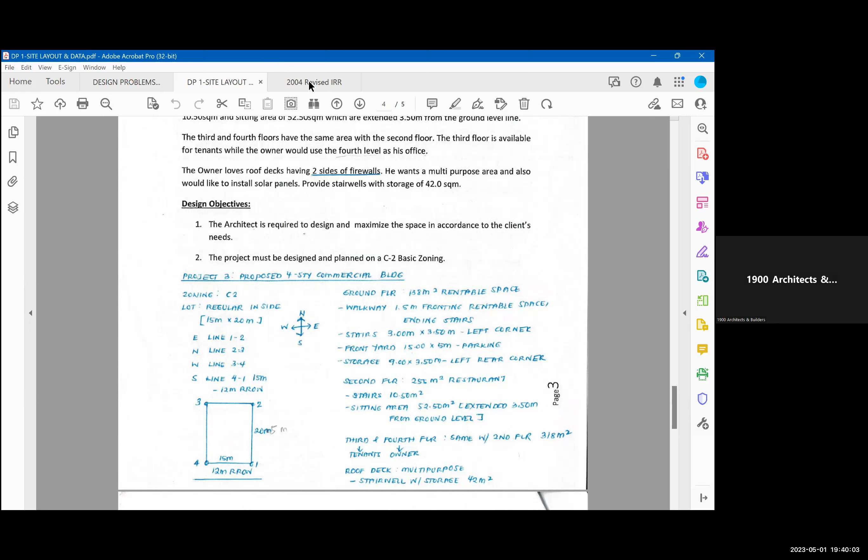So ang question ay ano daw yung ceiling height ng owner's office if using artificial ventilation. So, paano natin makukuha? Alamin natin kung anong floor yung owner's office. Ang owner's office ay nasa 4th level, sorry, as his office. So, ang nakasulat dito sa Rule 8 or Rule 7, yung succeeding floors daw ay not less than 2.1. So, the answer is 2.1, letter C. Okay? So, minimum ceiling height.

Okay, so number 5, based on the given data of the project, how much is the percentage of site occupancy? So, like ni-mention ko kanina, ano ba ang formula ng PSO? PSO is AMBF over TLA. Meron na tayong AMBF, nakuha na natin yan kanina sa number 1. And then, ang TLA naman is given sa project. So, AMBF, 202.5 divided by the TLA, 307.5. Ang lalabas niya ay 65.85%, which is letter A.

Okay. Pero may question ako. What if ang tanong dito sa number 5 is based on the book, based on Rule 8, how much is the percentage of site occupancy? Kasi, di ba, pag nag-base tayo dito, may given na siyang percentage. Right? So, hanapin nga natin ulit. Compare ko lang yung page ko. So, table 8.1.

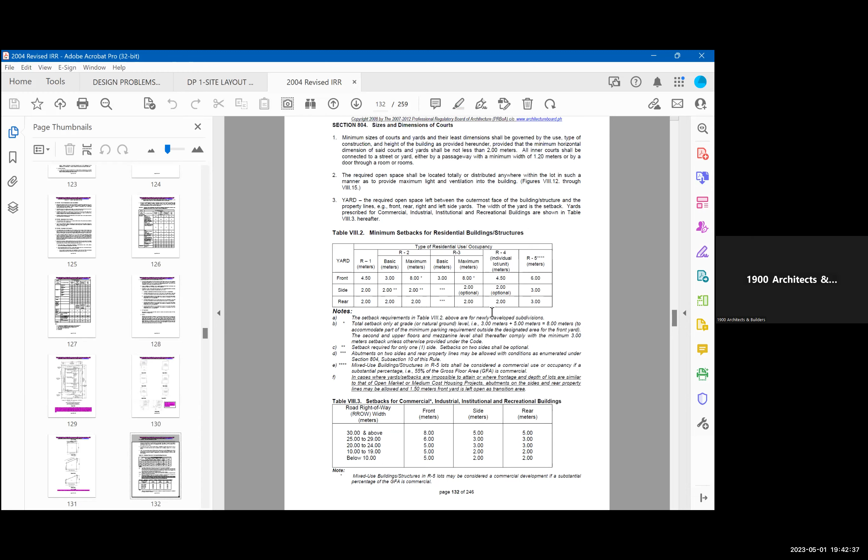Okay. So, if the question is not based on the problem, if the question is based on Rule 8, what is the PSO? Magre-refer tayo sa book. Minsan may ganun ding question, based on Rule 7 or Rule 8, tapos minsan naman based on the problem. Kasi pag based on the problem, makukuha natin yung exact percentage. But based on the book, may sadyang required percentage siya. So, commercial 2 yun, di ba? So commercial 2, yung PSO is either 75% without firewall, then 85% with firewall.

So, be conscious din sa mga ganun tanong. Maraming questions na sasabihin naman niya kung saan ka magre-refer. Lalo na pag sasabihin niyang based on Rule 7 or Rule 8, wag nating pababayaang hindi natin masagot ng tama kasi nandito na, nasa Rule 7 and Rule 8 na yung sagot. Okay?

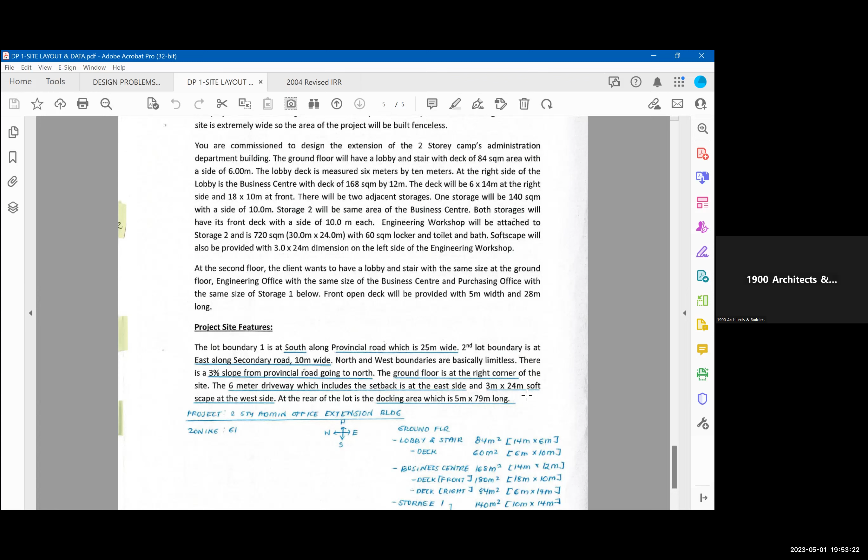The ground floor is at the right corner of the site. The 6-meter driveway, which includes the setback, is at the east side, and 3 meters by 24 meters softscape at the west side. At the rear of the lot is docking area, which is 5 by 79 meter long. So yon, ang dami ng data, ang dami na.

Sige, eto. So the first thing we need to do, isa-isahin na natin. Huwag muna tayo medyo mabigla sa mga paano natin i-layout to. So just write down yung mga important things: the project title, the zoning, and then yung data ng every floor, every area per floor na sinabi niya. So based dito sa problem, kumbaga yung location per area ay detailed.

So let's try to do the floor layout. So wait lang, share ko muna sa inyo. Okay, unahin muna natin, iba sinulat na natin isa-isa kung paano niya yung per area. So unahin natin, where do we start? Kung saan sinabi, saan ba unang sinabi ng problem, hindi ata mag-share.

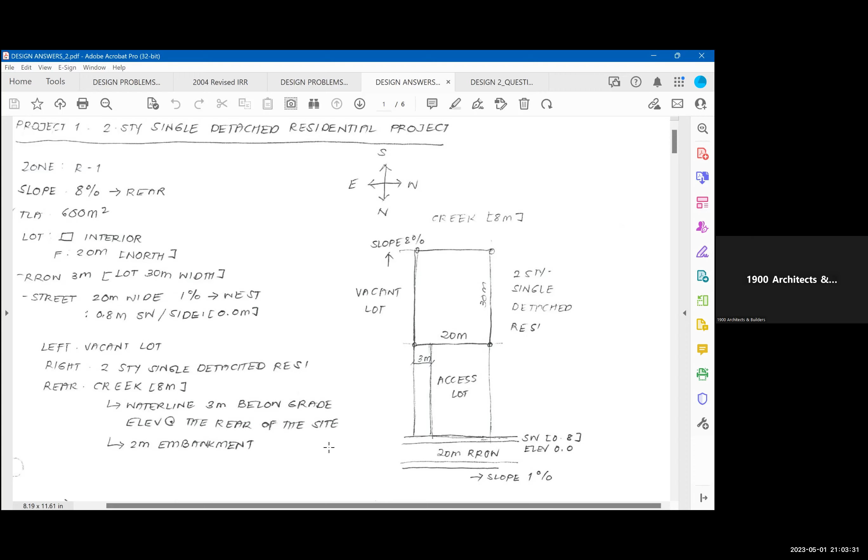Okay? So yun yung mga information. Sinulat natin yan. Importante na sulat nyo din. Okay. So hopefully nakuha nyo to, na-plot nyo ng tama. So let's go to project 2 naman.

Okay. This is project number 2. A proposed garment and undergarment factory project on a project site having a 4% slope. Statement of the problem. A privately owned company has decided to erect a building on its property with a total lot area of 8,000 square meters, located in an industrial zone. The structure to be erected shall be an industrial building.

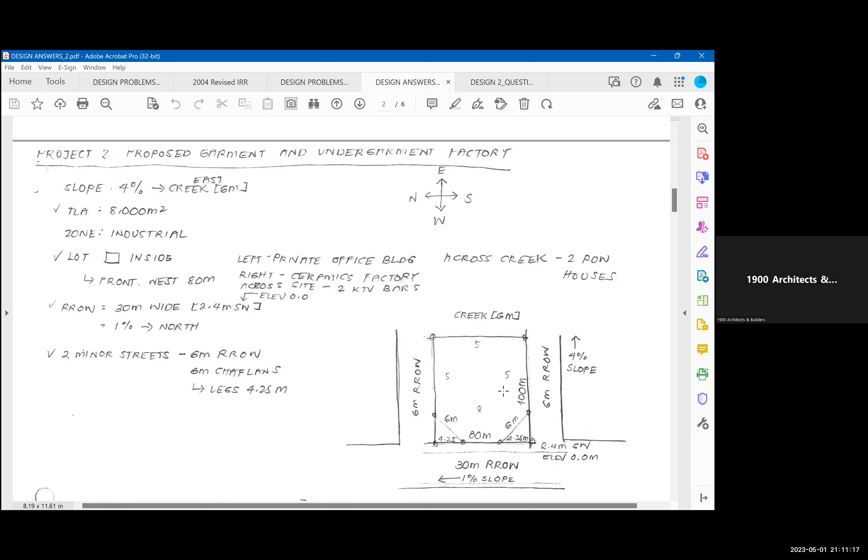Okay? Then, let's go to project number 3. Okay, project number 3. A proposed high-rise office condominium, i.e., a development with a basement, a podium, covered parking, and a tower component on a project site having 3% slope. The statement of the problem. A privately owned company has decided that its C3 zone property with a total lot area of 5,400 square meters located in a rising urban center is to be developed into a high-rise office condominium.

The project development shall consist of 2 types: 40 square meter GFA office units, and 80 square meter GFA office units. Project site features. The project site is a rectangular corner lot. The shorter side, measuring 60 meters, faces the west, and the longer side faces the north. The project site uniformly slopes at 3% towards a 36 meters wide main street at the north side, i.e. the road right-of-way that is relatively flat at slope of 0% and which has 5-meter wide sidewalks at both sides.

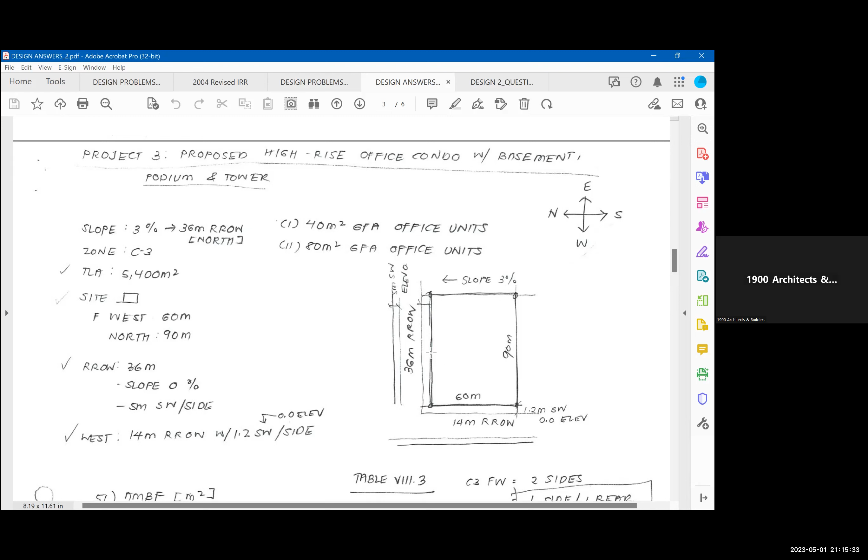So, then the project site uniformly slopes at 3% towards a 36-meter wide main street at the north side. So, nasan yung north side? Nandito yung 36 meters road right-of-way. And then, yung slope daw ay towards doon. So, if this is the 36 meters road right-of-way, ito yung main road, di ba? Parang ito yung lumalabas na frontage niya. Center ng main road. And then, the road right-of-way is relatively flat, 0%, and has 5-meter sidewalks on both sides.

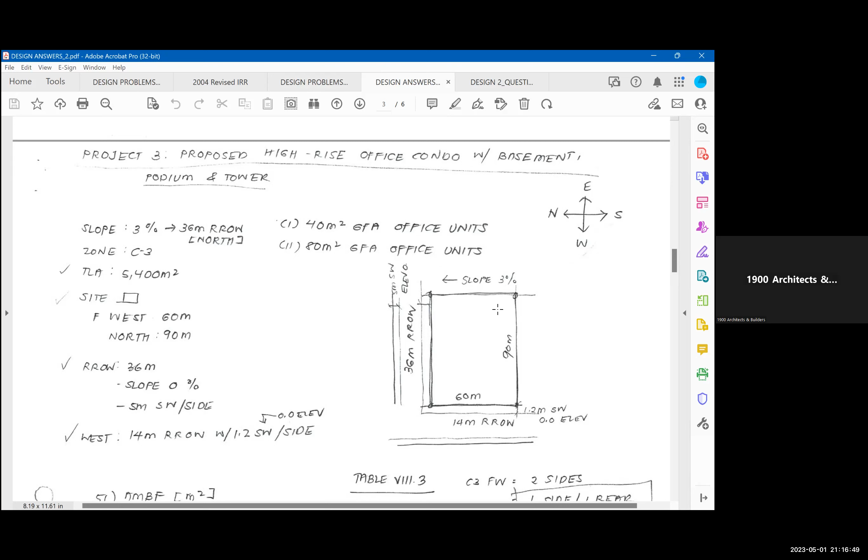Then the west side naman ng property faces a 14 meter ROW, with 1.2 meter wide sidewalks on both sides. Okay? So basically, yun lang yung description ng site. So hopefully nakuha niyo na ito. Okay, so next, we can proceed sa next problem naman. Hopefully nakaka-follow lahat ha.

Okay, let's go to project number 4. A proposed low-rise government building having 2% slope. It's the statement of the problem. The local government of a first-class municipality has decided to erect a building on its property with a total lot area of 10,000 square meters located in a new government center. The structure to be erected shall be a low-rise municipal town hall building.

Project site features. The project site is a rectangular through lot with a 100-meter wide frontage facing the south. The road right-of-way is a 30-meter wide street, relatively flat, at 1% slope draining east. The site is at a slope of 2% towards the 25-meter wide RROW at the rear of the site, which has a 2-meter wide sidewalk with 0.5-meter wide planting strip. The 30-meter road right-of-way has 2.5-meter sidewalk on both sides with a 0.6-meter wide planting strip.

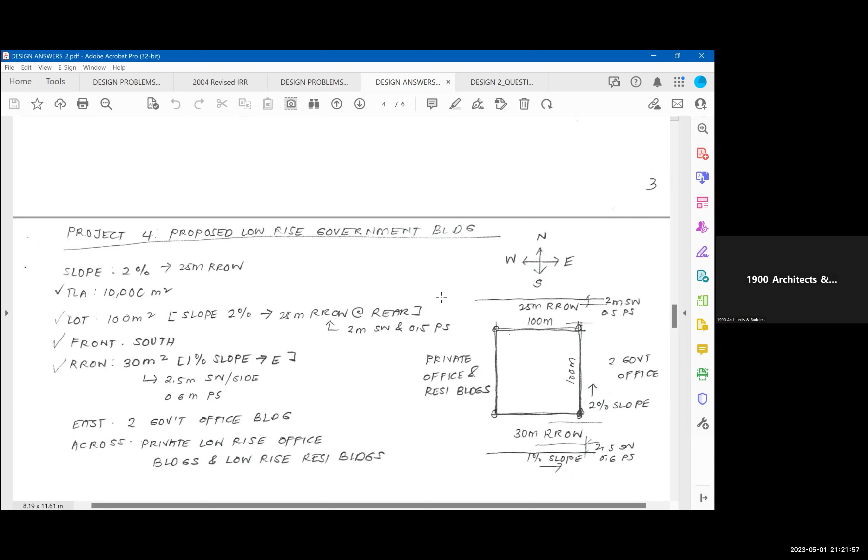So, next is number 5, this is the last. Project number 5 is a proposed low-rise school building project having a 5% slope. Statement of the problem. A leading school chain developer has decided that its newly acquired property with a total lot area of 6,000 square meters shall be developed to host a low-rise school building, which is the project. It's located in a GI zone. Ano ba ang GI? It's a General Institutional zone.

The school shall offer classes from grade school to high school. The project site features. The project site is an inside lot with a 60-meter wide frontage facing north. The project site uniformly slopes at 5% towards the 24-meter wide street. The road right-of-way is relatively flat and has 2-meter wide sidewalks, which include 0.5-meter wide planting strip at both sides. The surface at the center of the project site frontage is considered as elevation 0.

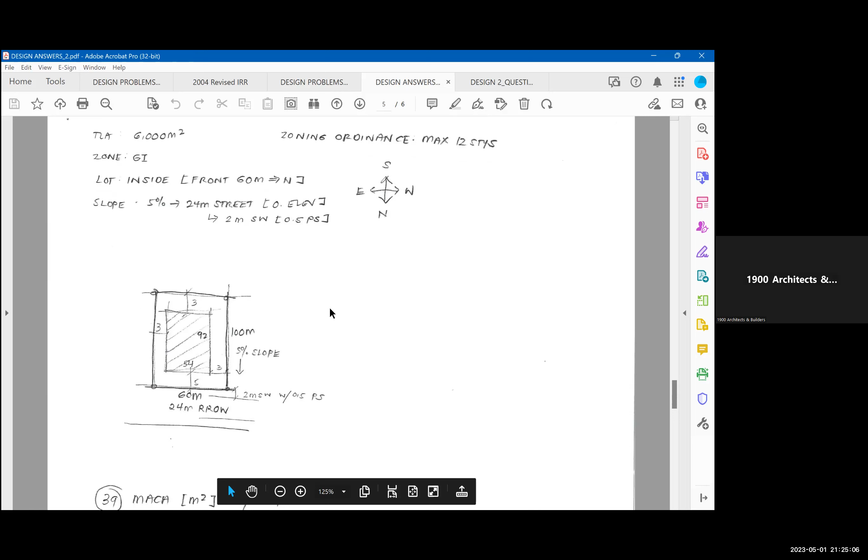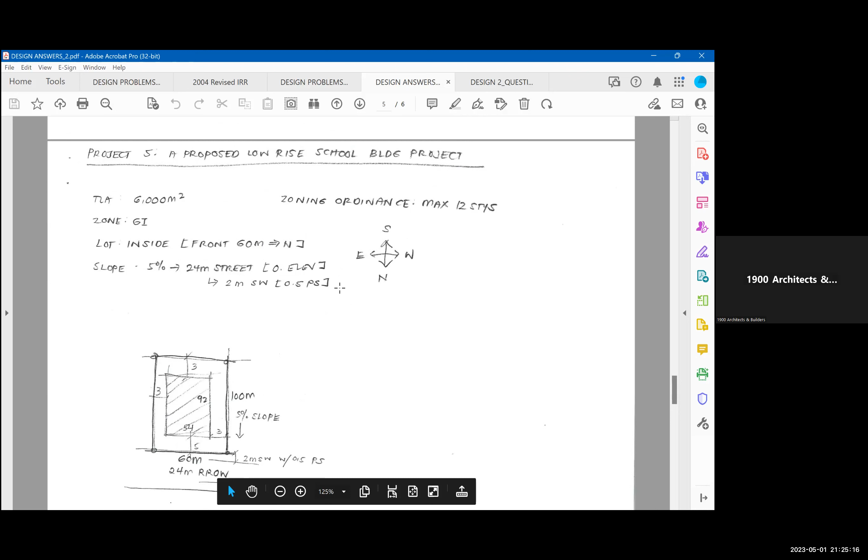Okay, so project title, proposed low-rise school building, and then information na binigay, the TLA, 6,000 square meters, yung zoning niya, yung lot type niya, which is an inside lot. Importante. Tapos may mention din dito na zoning ordinance declared the zone for buildings up to 12 stories. Okay, so plotting, ang una niya sinabi, the project site is an inside lot. So inside lot siya.

With a 60-meter wide frontage facing north. So the north side is there, at the bottom. Okay, so 60 meters is the frontage. So what will be the depth? 6,000 divided by 60, we have 100 meters here.

Then, the project site uniformly slopes towards the 24-meter wide street. So it slopes going to that 24-meter road right of way. And then, with a 2-meter wide sidewalk on both sides, plus a 0.5 planting strip on both sides as well.

Then, to the east of the project, there's an exclusive subdivision. At the west, across the project site, is a long row of low-rise buildings. On the west side also, there's a commercial, mixed-use commercial-residential building. Then, there's an ordinance stating a maximum of 12 stories, so take note of that.